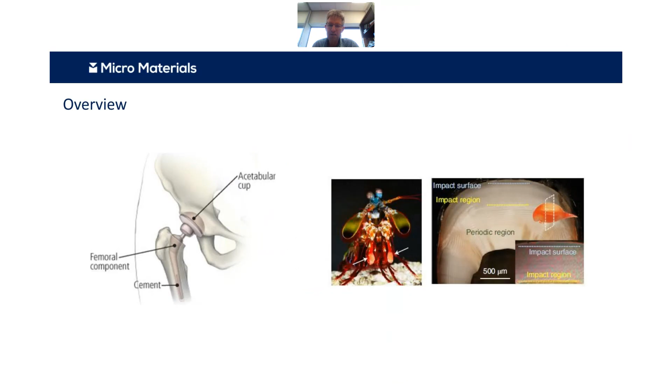Well, you can kind of split things into two areas. On the left, you have designing improved total joint replacements, hip replacements, so very much around biomechanics and biomedical engineering. On the right, you can also learn from nature to develop damage tolerant materials, so very much a biomimetic type approach. I'm going to try and give a few examples of these research areas in the presentation.

So I will very briefly introduce nanomechanics if people are not aware of what it is as a test technique. Then I will give a little dive into time-dependent deformation, and that will then lead into a short case study. Thank you very much to Professor Jason Zhang from Birmingham University for providing some slides for that. Then I'll talk a little bit about strain rate sensitive behavior, with some examples, again, mostly from the UK. And then I will finish up with some examples of tribological testing at small scale and show how that can give us useful information.

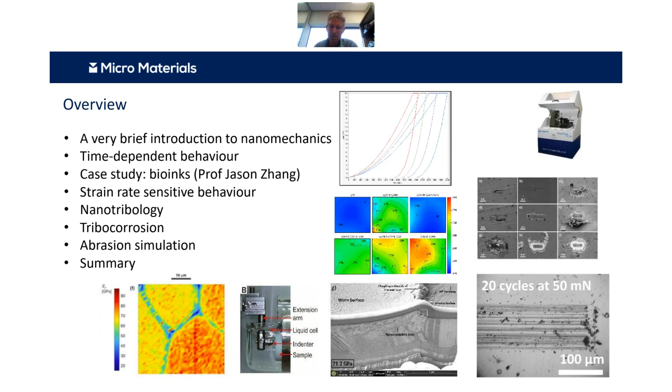So nanomechanics is really all around trying to design small-scale tests to solve big problems. Characterizing the mechanical properties of materials at small scale can be quite critical, particularly for these sort of biomaterials, under the relevant environmental conditions, be they of environment, temperature, moisture level, or strain rate, and also to try and simulate those contact conditions in our testing. That allows us, and our users, to develop an improved understanding of how these materials behave under these conditions, and therefore to design better materials.

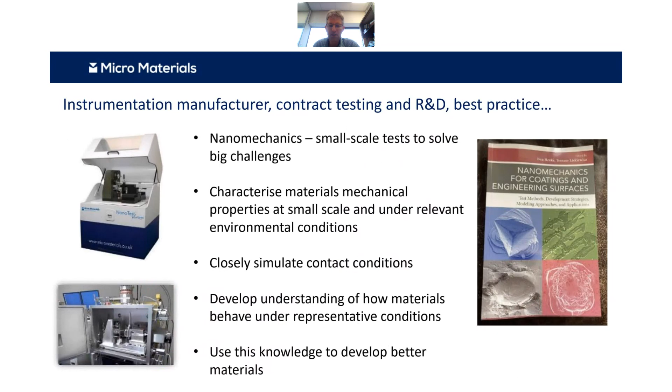So the work I'm going to be describing today is all done from various different groups on Nanotest Vantage systems. For those that don't know, Nanotest Vantage is a nanomechanical test platform. It's multifunctional, with capability for a range of different small-scale mechanical tests: indentation, scratch, wear, fretting, impact. These can be done at nano and micro scales with different loading heads, and also different environments, different temperatures, different moisture levels. In some cases, you can add additional information by multi-sensing test techniques that really allow you to understand, with these multiple signals, what's going on in these different contact situations.

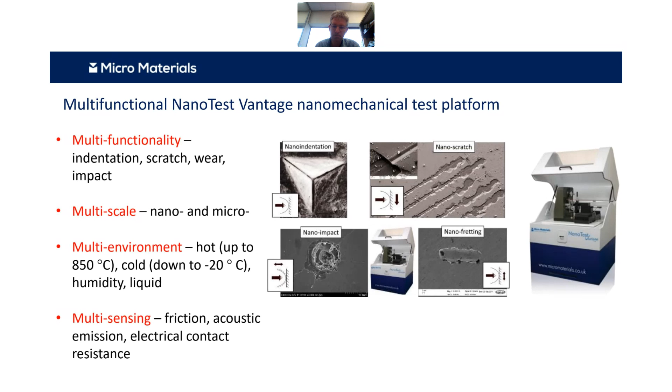So for those that don't know, nano indentation is essentially a very small scale hardness test. We're applying a load, or a force, to a very sharp point, and then indenting into a material. There's some penetration, and then as we unload, there's some partial recovery, and contact mechanics is applied to that unloading slope to determine primarily the hardness and elastic modulus, but there's also a range of other information you can get from these types of tests.

So this example here is on a fused silica reference sample. Fused silica is mechanically isotropic, so if you indent it at different positions, you should get the same behavior, and that makes it very, very useful as a reference sample.

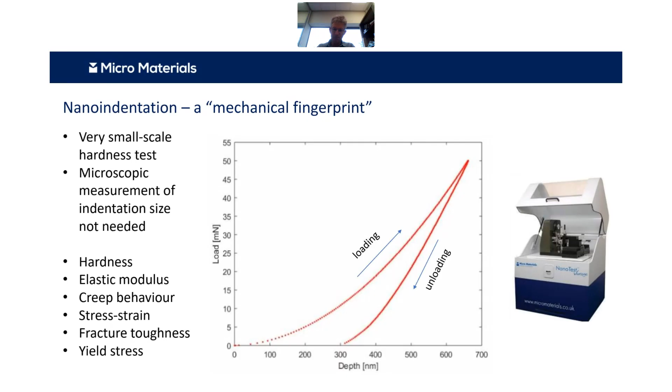Biomaterials, however, are inherently more complex. They are mechanically heterogeneous at different length scales, typically. So here's an example of how we can use the sensitivity of the test techniques, the ability to put very small indentations very close together, to pull out some of this very localized mechanical property information.

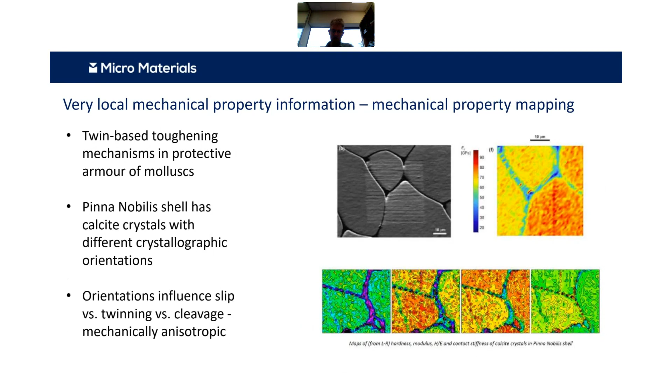There's some examples here where the instrument has been used, in this case by a group in AGH in Poland, to show how this seashell essentially has calcite crystals with different crystallographic orientations, and these orientations influence the relative proportions of slip, twinning, and cleavage that occur. So you can pull out differences in this and understand how that builds into the toughening mechanisms that these protective armor mollusks have. And once you have this information, maybe you can use that knowledge to design better materials.

So if we think for a moment why that might be—and again, I come from a coatings background, so it's easier for me to think in terms of these type of things—you can think very much of a multi-scale material, and also think of the different length scales involved when we're considering the elastic and the plastic stress field.

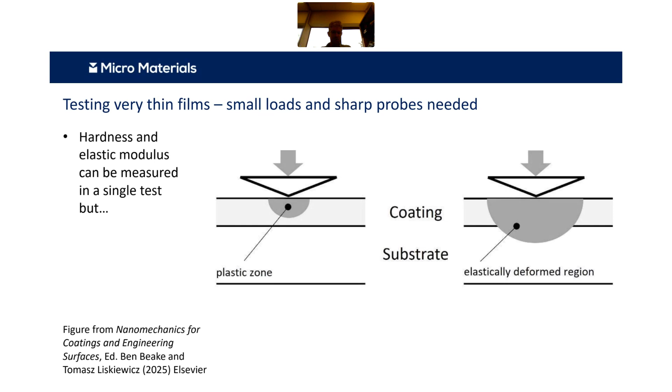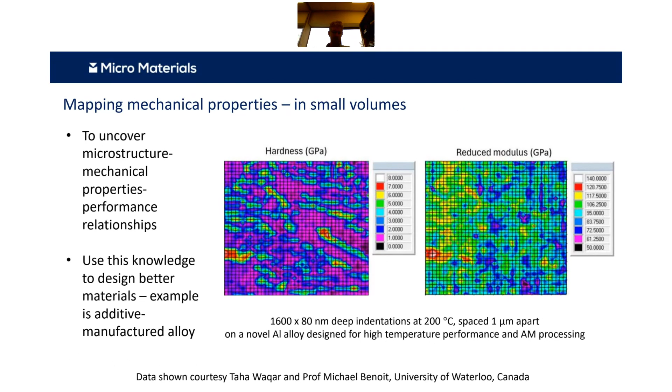So all of that is assuming that these materials are behaving in an elastoplastic manner. Biomaterials typically are less so - they don't do this quite as much, to say the least. So they have time-dependent deformation: viscoelastic, viscoplastic deformation.

This is actually not a biomaterial, this is a polyester. We've got a couple of examples where the only difference, indented at different positions, is the amount of hold at peak load before unloading. The red curve shows this so-called nose or bow during unloading. If you try to apply standard elastic unloading analysis to this, you don't get a sensible elastic modulus measurement at all. However, if you apply the same analysis after a sufficient hold period, you can get reliable numbers.

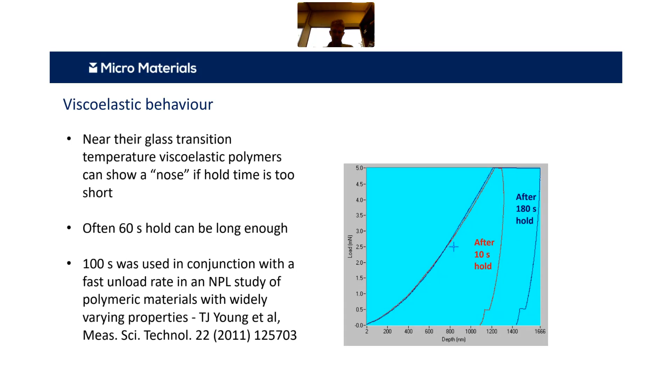There's an example there from National Physical Lab a while ago. So again, you can improve things by increased hold together with a fast unload rate. This is mentioned in ISO a little bit.

They talk a little bit about how you can use this to design, particularly for soft metals, but the same sort of things apply very much for polymers - you want to have this relationship where the unloading rate is sufficiently greater, more than 10 times the creep rate at peak load divided by 1 over the stiffness. If you do that, the effect of creep on your unloading elastic modulus measurements is minimized and you can get a reliable value.

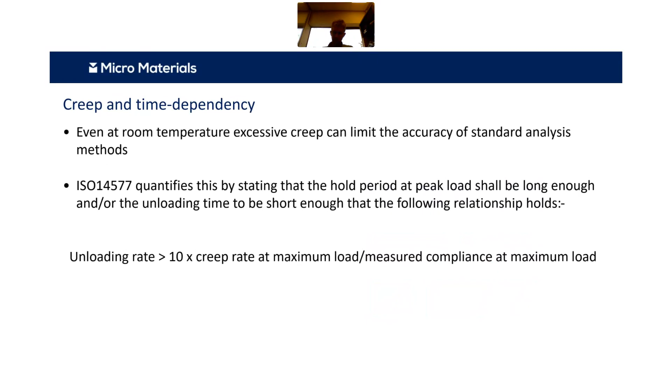So an example of this in practice, going back quite a while, is a study on some polymeric nanocomposites. Here you can see there's a load-time protocol of something like 300 seconds or so, and most of the test is a hold at peak load, with an additional hold at 90% unloading.

This is not for thermal drift correction, this is for looking at creep recovery. It's very difficult to separate, for highly viscoelastic materials, the effects of creep and thermal drift, creep recovery and thermal drift. So it's preferable to have a low drift instrument like the nanotest to do these tests rather than try to correct things out.

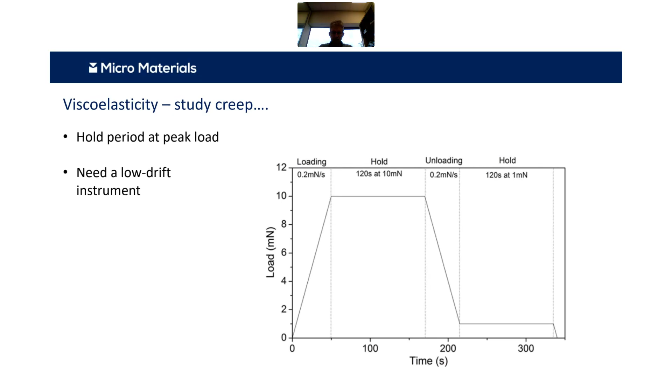So if we take this experimental protocol and apply it to nanocomposites, polymeric nanocomposites - if we think about a nanocomposite, it has lots of useful properties, you have a polymer matrix, but you might want to improve its creep resistance and stiffness. One of the ways that's commonly done is by introducing fillers.

In this case, shown rather schematically again, a conventional filler - illustrated here for clay tactoids - is shown on the left essentially. So you're getting some polymer chains, there's some breakup of the structure, but not much breakup, and most of those polymer chains are basically not affected by that filler. So you can put quite a lot of filler in there and it's not doing so much for you.

If you intercalate, you can increase the gallery distance within the clays, and then you can put polymer chains within there. That's quite a good strategy, and in practice it's shown that you get even bigger improvements for exfoliated structures. So a lot of polymer and composite design is based around trying to optimize for these intercalated and exfoliated structures.

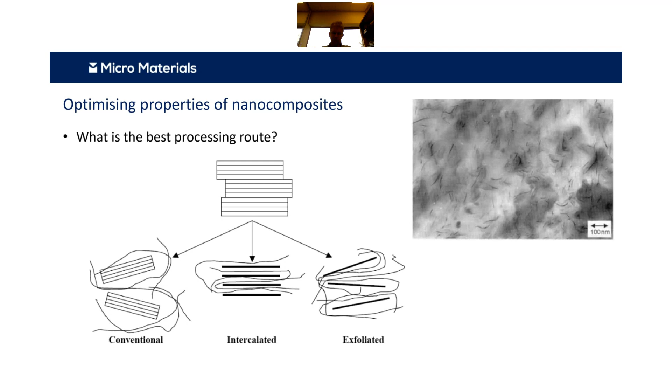So we have an example here, again from quite a while ago, where there is a nylon 6 thermoplastic which has then been modified with sub-micro composites and nanocomposites. You can see on the left there, they do change the curves a little bit - they change the creep resistance, they change the unloading slope - but it's not immediately obvious from those curves. It looks a bit of a mess.

When you crunch the numbers on the right, you can see straight away that for a given filler loading, the nanocomposite route is better. So that's implying better filler-matrix interactions. But equally, you can see the increases are relatively modest - for 20% filler loading of clay, which is a much stiffer material than the polymer, you're only getting sort of a doubling or so of the stiffness.

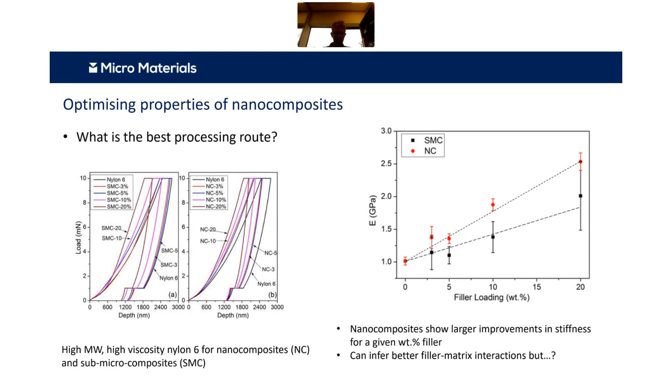So what's going on? Why is the nano better, apart from quantitatively? Well, you can use the advantage of having had that long hold period in the experiment and say, rather than this creep being a headache that affects the accuracy of the unloading measurements unless you account for it, we actually say it's useful in itself to look at and study.

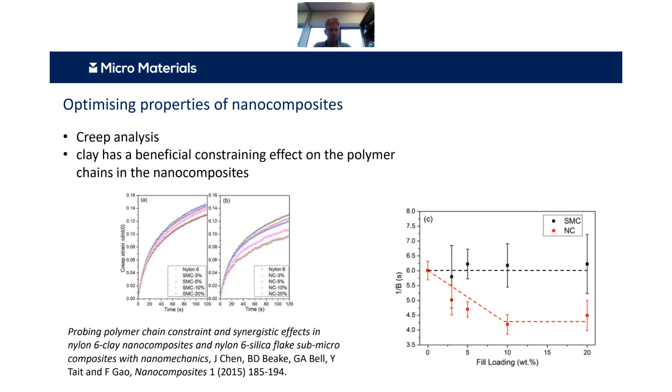So here we're able to apply some simple analysis we developed to look at time constants in this case. What you can see is that the time constant for the submicron composite essentially is not being affected by the filler loading, whereas on the nanocomposite it is significantly altered. This tells you that there's a beneficial constraining influence on polymer chain constraint in one system but not the other.

Nylon essentially is plasticized by small organics and also by water molecules. So if you want to design this type of test, the best way to do it is to dry it out and then introduce humidity, moisture into that cell gradually rather than try and do it the other way around, because studies have shown it takes the best part of 10 times longer to get the water out than it does to get the water in. So you can study these things.

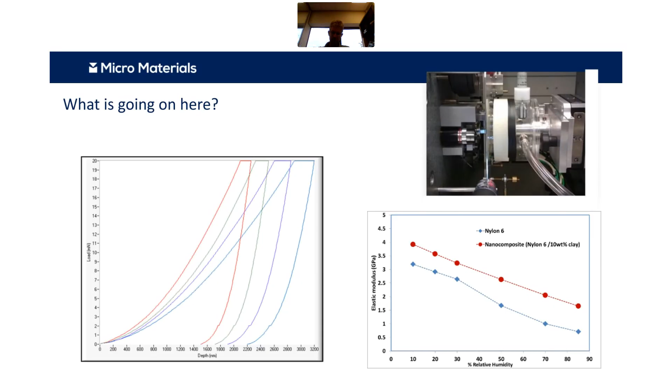So that was sort of background on the test methodology. This methodology has been applied to look at various different biological applications. Here's one, courtesy again of Professor Jason Zhang and his team in the soft matter engineering group at the University of Birmingham here in the UK.

Jason's group were particularly looking at bone tissue engineered scaffolds, and particularly how they could design the hydrogels as part of those scaffolds. Hydrogels, as you can see, have many very useful biocompatible properties. However, the challenge is twofold: one is that they're not particularly stiff, and two is their time dependent deformation.

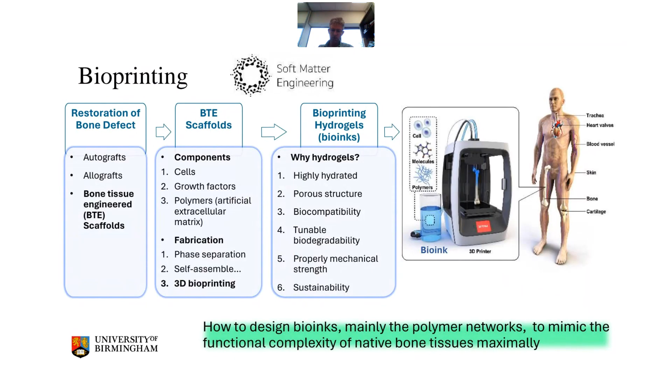So what Jason's group were looking at was ways of improving on the properties of these hydrogels. So they took this microfibrillated cellulose, where you break up the structure of the cellulose fibers and increase the surface area, giving much more opportunity for hydrogen bonds. Then you create these ionic covalent entanglement networks.

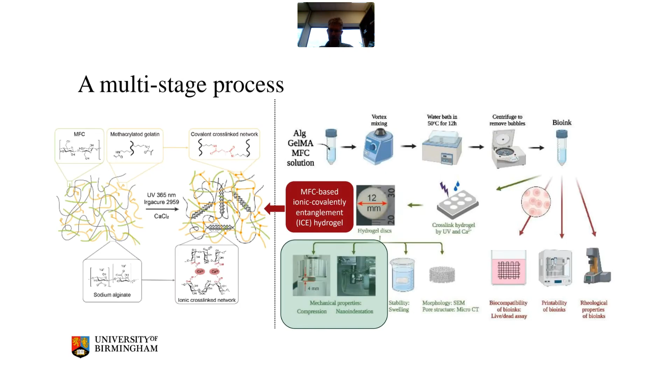This network is in between this hydrogel of methacrylated gelatin and sodium alginate. You can see that structure he's got there, and then his group, as part of this multi-stage study, looked at the mechanical compression, but also the small-scale mechanical properties to have a better understanding of what's going on in terms of the subtleties of the process.

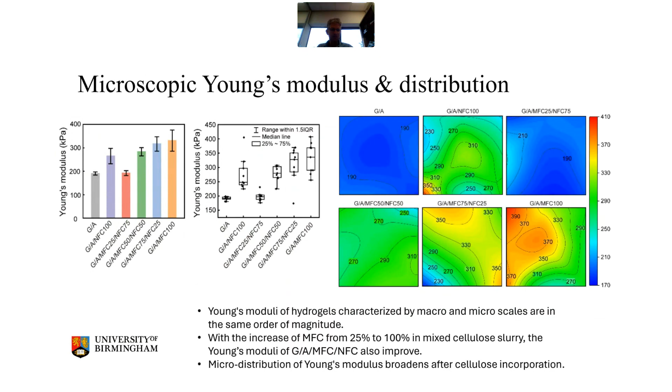What they found here is in agreement with macroscale compression data: putting in the nanofibrillated or microfibrillated cellulose increases the stiffness of the composite. It also changes the distribution a little bit, but somewhere in between those it's less successful. So it's interesting to find out why, and we can dig behind that a little bit.

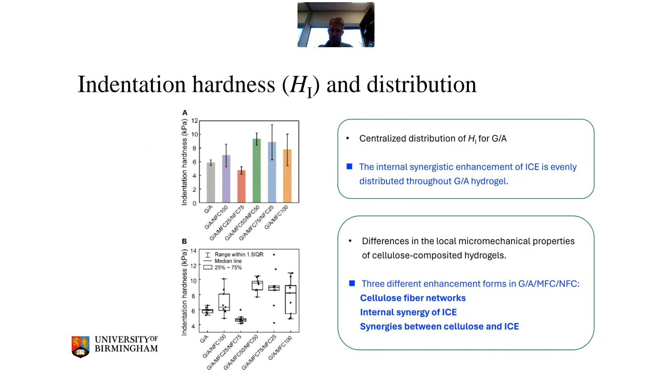Before that, he's talking a little bit about different enhancements coming from the cellulose fibers themselves, from synergy between the cellulose fibers and the ionic covalent entanglement networks, and also between the two things. So hardness is a slightly less useful parameter than modulus for these things, but more information is again found through looking at the time-dependent deformation.

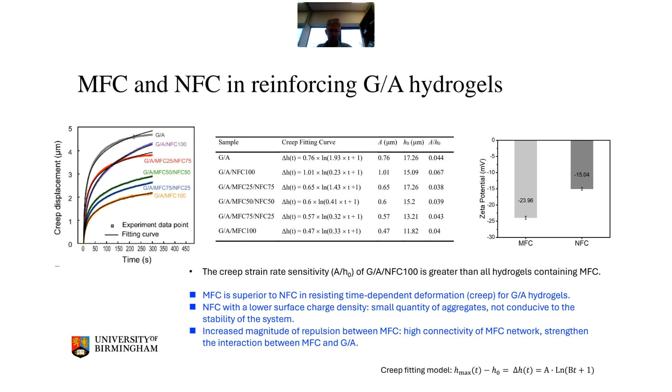So there's a little summary of what Jason put about this work. Apart from getting into these improved materials, they're understanding fundamentally how these materials work. I should have said a little bit more about the time dependency and how the hydrogen bonding is affecting that essentially.

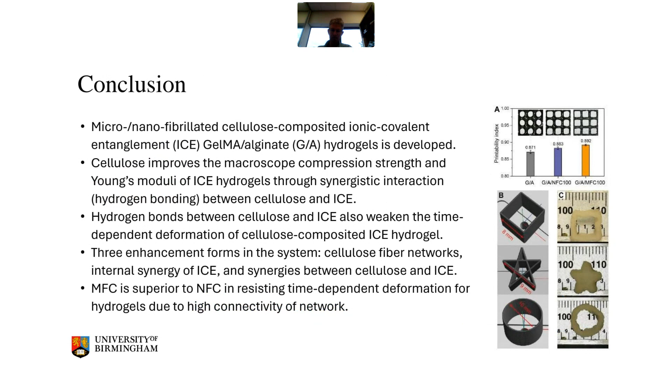So all useful stuff, but very much within the bounds of quasi-static testing. Nanoindentation is a so-called quasi-static test technique. In many real-world processes, including biological samples, the impacts involve a high strain rate process, so impact is really more important.

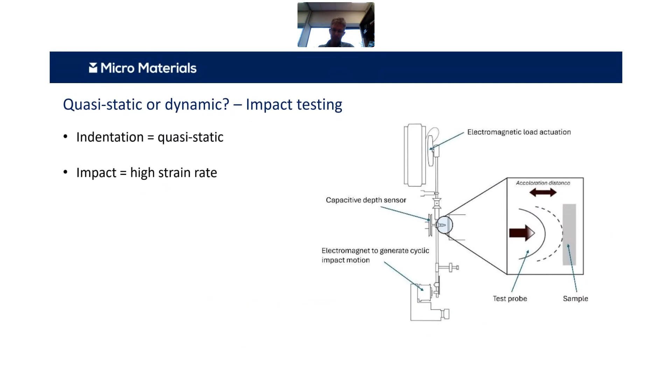One of the first situations where this type of thing was done on biological samples was at MIT, when they were looking at trying to simulate the damping response of different polymeric systems and match that response to various tissues, as part of developing armor for the US military, essentially. In this case, they've got very soft samples being impacted through liquid, and rather than these very small diamond probes, now we're getting a small, a few millimeter spherical probe, and you can achieve some quite high energy densities with this testing.

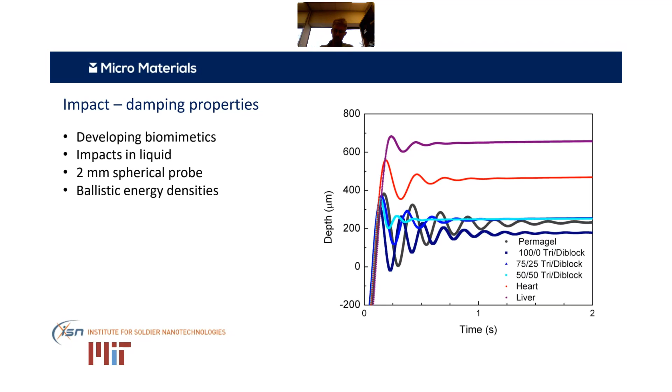More recently, also out of the US, is some work done at UC Riverside by Professor David Kisailus and his team. They were looking particularly at the dactyl club of the mantis shrimp. In its operation, it's subject to many thousands of impacts to get its food. How does this work? They noticed that it's got this hierarchical nano or micro level structure with different reinforcement at different length scales, and they're trying to understand why.

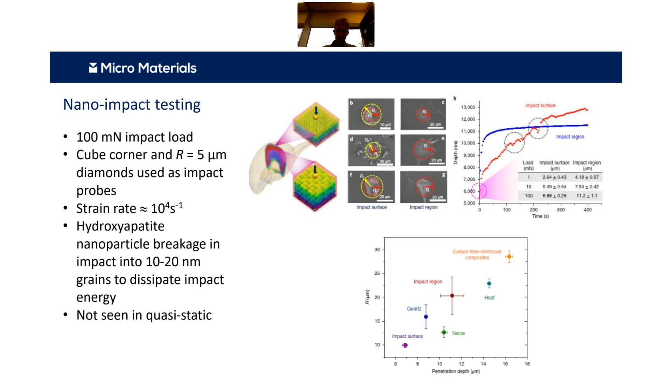A few years ago, that group relocated to UC Irvine, also in California, and continued their work developing understanding for resilient multifunctional materials. Particularly, they were interested in coating systems - how to balance hardness and toughness to most effectively dissipate impact energy. There's a couple of references there, and the pictures are taken from the one on top.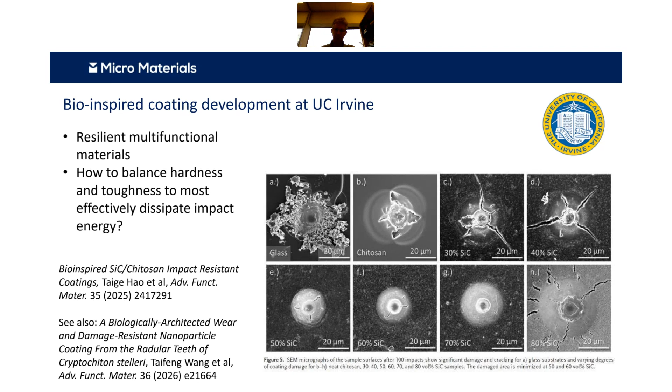So moving on to the tribological part of the tests, essentially. If we think about tribology, a lot of tribological testing is done at a more macro scale, where there is high pressure contacts between the asperities. What you're seeing is that the assumption in something like a pin-on-disc test is that you can calculate an apparent contact pressure, and that is the contact pressure.

But if you zoom right in, there's this very nice example, a somewhat famous paper by Kathy Wahl and Greg Sawyer, where they show that the real area of contact is initially a tiny fraction of the actual apparent area of contact.

There have been some very nice experiments done quite a long time ago now, where people have looked at transparent surfaces, and the contact between sliding transparent surfaces as a function of load. You can see just how much of the material is in true contact, and when it's not in contact, the light is scattered, so you have a very clear metric in terms of how much is in contact.

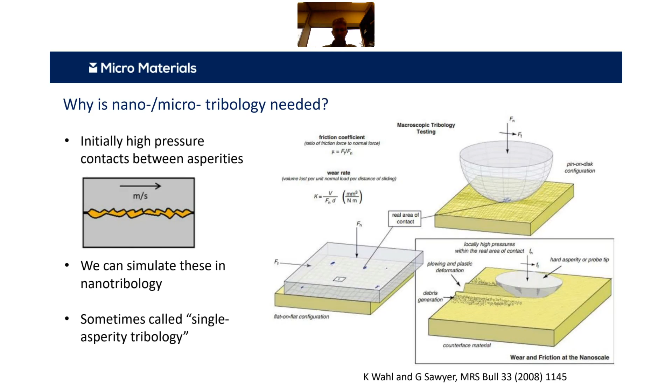We call these types of tests perhaps nanotribological tests, but generically I would say single asperity tribology is essentially what we're talking about. Nano and microscale tests are particularly useful. We can do a lot of these types of tests in the NanoTest Vantage system. We have lots of scratch tests, some fretting tests, some reciprocating tests. All of these things build into that type of contact.

So if we think about systems in general, biological systems, fully lubricated contacts are the ideal, with low clearances. So a lot of people are going to design these things on the assumption that you have this fully lubricated contact.

There's lots of different ways to design this system, and there's a lot of work going on where small scale tests are really helping inform the materials choice and the alloy development choice by replicating these in vivo conditions and understanding these damage mechanisms better.

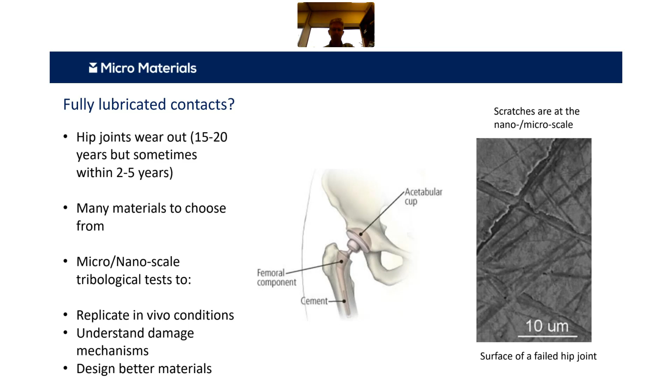So here's a simple example from the University of Birmingham. Here they are looking at cobalt chrome alloy, and they're looking at reciprocating wear of this in a phosphate buffer solution, sliding over 1.5 millimeters, and then essentially seeing what happens.

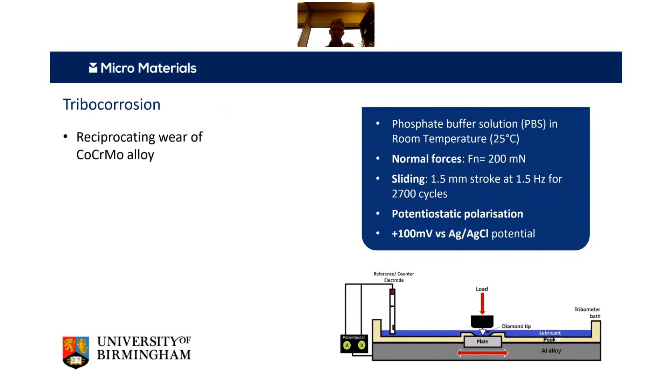This is Mike Bryant's group at the University of Birmingham. First of all, you can see on the unmodified surface here, you can mechanically map that unmodified surface, and you can see it has a fairly tight hardness distribution. So it's very hard for a biomaterial alloy, cobalt chrome. These are fairly typical values, just over 5 GPa.

After the wear tests, after the tribological tests, they've then sectioned through that, and you can see that the microstructure that you see on the left has now evolved into a much finer microstructure just under the surface. So you're having this recrystallized layer, a tribologically transformed structure, if you like, and this has altered mechanical properties.

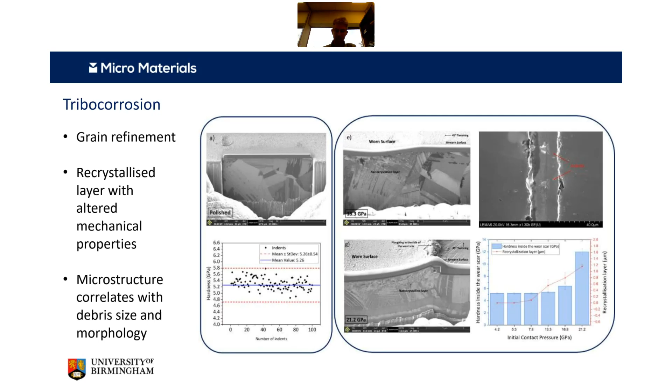As you can see bottom right there, a different group in Birmingham has been looking at how that changes in terms of contact pressure and layer thickness. This was interesting because they found some neat work showing how this microstructure correlates with the size and morphology of the debris. That is one of the issues in these systems, is how this evolves.

Similarly, there's some work from quite a number of years ago now in the NCATS in the UK, down in Southampton. Here, Dan Sun was doing some work, in this case looking at scratching in, again, simulated body fluid, and performing the scratches at sufficiently high load that she could remove the native oxide.

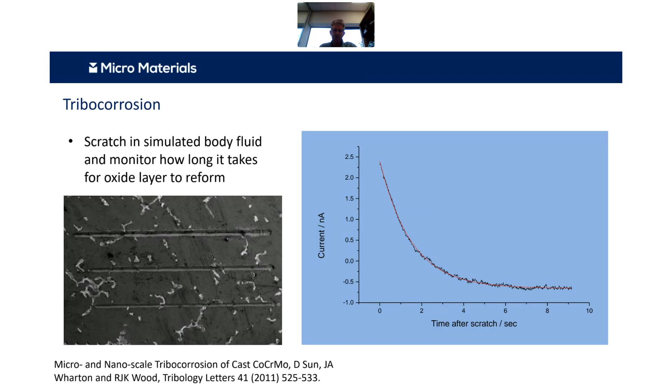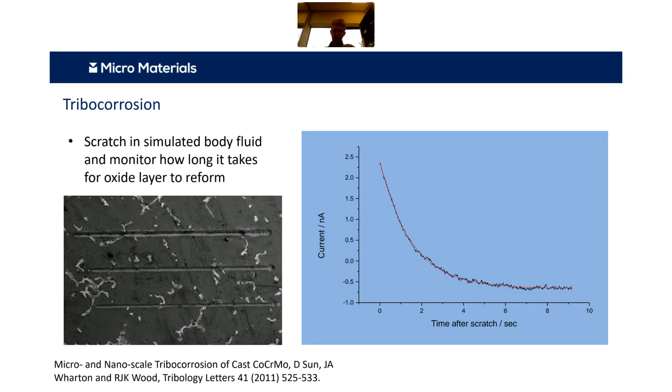As part of this sort of aseptic loosening, this metal ion release is considered to be one of the headaches to try and avoid and design alloys around, to mitigate this problem in joint design. It's interesting that, as you can see there, the tribological tests that you can do in the NanoTest system show that it takes quite a while before this system calms back down and is repassivated. So again, you can compare this type of thing against different alloys and design the one that has the best resistance to depassivation and the quickest time to repassivation.

The work we did in conjunction with Tomasz Liskiewicz quite a while ago now was in looking at small-scale fretting of alloys, and there we were able to correlate with things like the H/E ratio in the material, and then looking at different load levels.

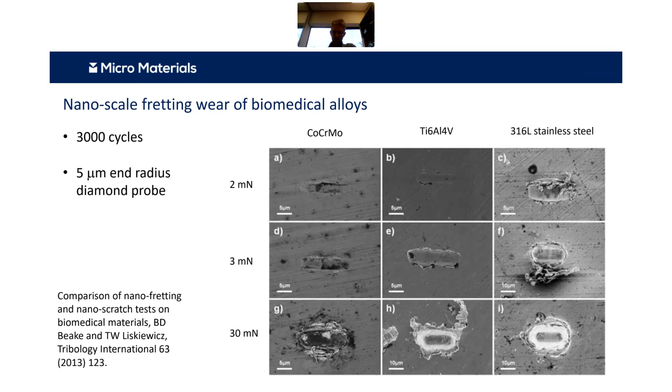More recently, we haven't published this yet, but we've been looking at small-scale reciprocating wear tests. We designed these so we can look at friction and depth, cycle by cycle, quantitatively, all corrected for any thermal drift that might be happening.

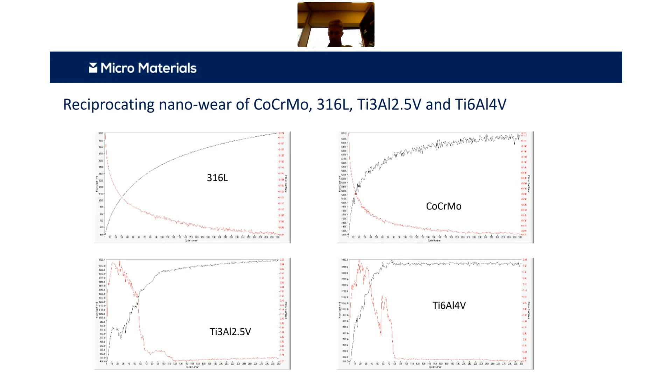In those type of scratch tests or reciprocating tests, all of the contacts are at the same point - you're going backwards and forwards in the same track, which doesn't exactly match what's happening in the body. One of the things we've been looking at is to simulate abrasion more generally by having computer controlled spatial distribution of scratches.

That's due to a transition in the attack angle, so there's promotion of this transition to cutting at lower angles when you have these multiple scratches, when you have residual stress fields and pile-up affecting previous scratches. So it's a much more reliable and useful test than just doing scratches in the same position.

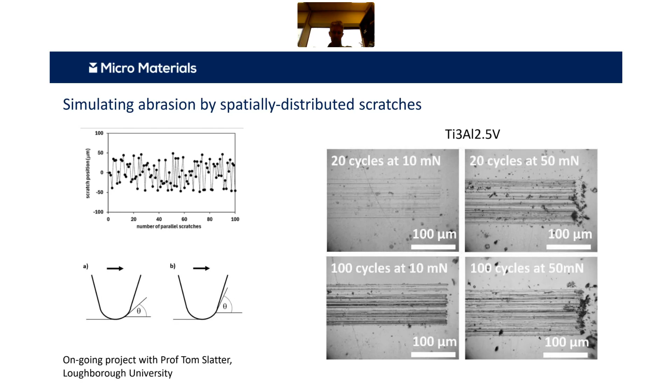So we've had some interesting results, particularly for additive manufactured applications that we're working on. There's quite a nice correlation between performance in this test and performance in the G65 abrasive test.

Hopefully that was a bit quick, but it gives you some idea of the potential of using nanomechanics as a test technique to study these links between structure, properties, and performance at very small scales under the right environmental conditions, providing information you're not able to get by other test techniques, and using that to develop better understanding and better wear-resistant materials, not just for biological applications.